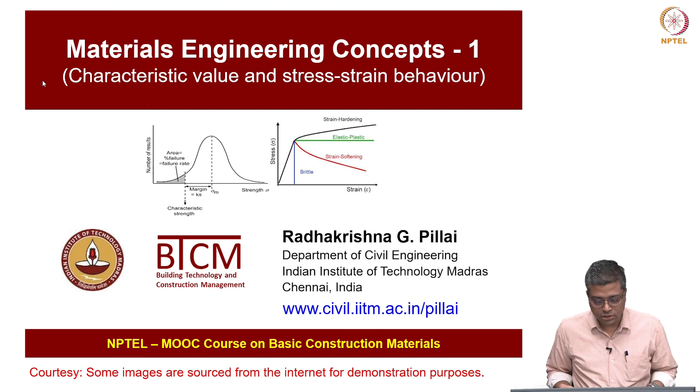Hi, today we are going to cover characteristic value and stress strain behavior of various materials. So, there will be 3 lectures which I am planning in this materials engineering concepts. Today is the first lecture, and these are the reference books which I use in this course module, and also we use a lot of information or photographs etc.

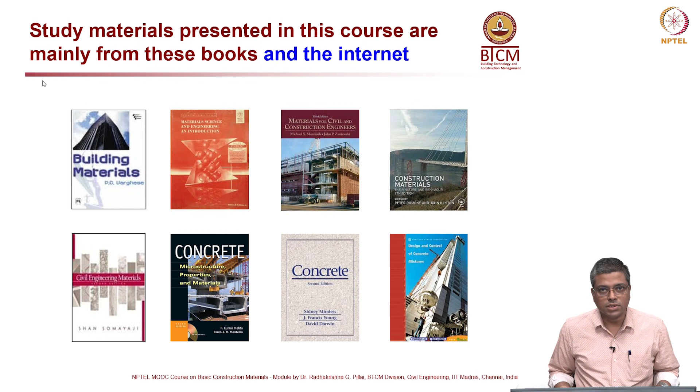from the internet. Now, the outline of this lecture will first cover variability in various material properties, and then also how to address this variability in the properties in the design process. That is where we use something called characteristic value, and then also we will discuss the stress strain behavior of various materials. We will cover elastic modulus, Poisson's ratio, yield strength, strain hardening, necking and failure, etc.

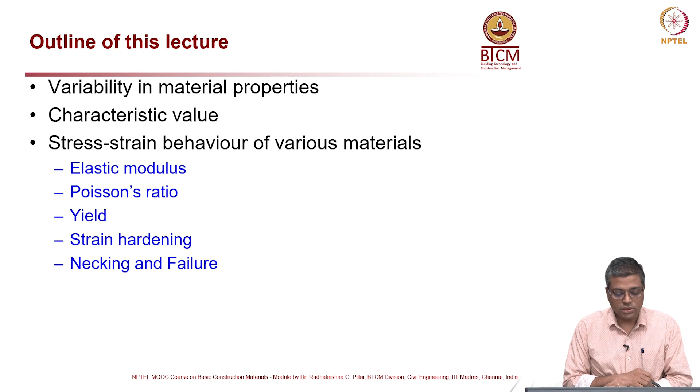So, variability and comparability of properties. I am going to cover just 2-3 material properties to tell you where we see the variability and what it is about. So, first let us talk about density. What is density? It is mass of a material per unit volume of the material, and it can vary significantly from material to material. From wood to metals, there could be a difference of about 2 orders of magnitude.

Another parameter is stiffness, which is the ability of any material to resist deformation, and from nylon to diamond it can vary by 3 orders of magnitude. Strength is another very important parameter which we look at while designing. Most of the time we give a lot of importance to the strength of the material, and it is nothing but the maximum stress that the material can resist without failure. From concrete to diamond, there could be a difference of 4 orders of magnitude.

Now, toughness is another parameter, which is also known as work to fracture or fracture energy. What is it? It is the ability to plastically deform and absorb energy until a failure occurs. If you look at glass, the toughness is very low, whereas in a very ductile material the toughness can be very high, or in other words, ductile materials can absorb a lot of energy before they actually fracture or fail.

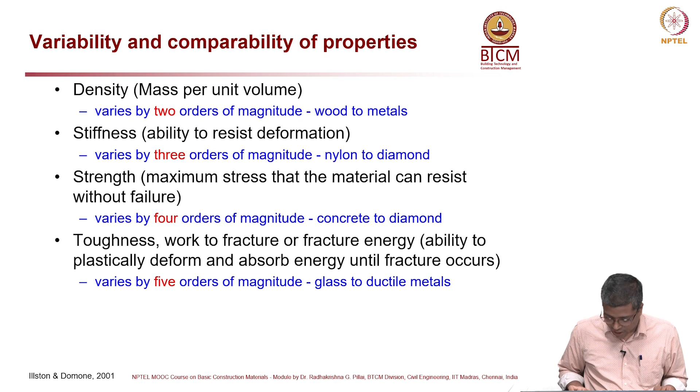Now, this is a table with these properties we just discussed. I do not want to go through the entire table; you can pause the video here and have a look at this table for a few minutes, and then you can understand the variability of these different parameters across different materials and also within the same material. For example, if you look at concrete, the density can vary from 1.8 to 2.5. The stiffness of concrete varies from 20 to 45 GPa.

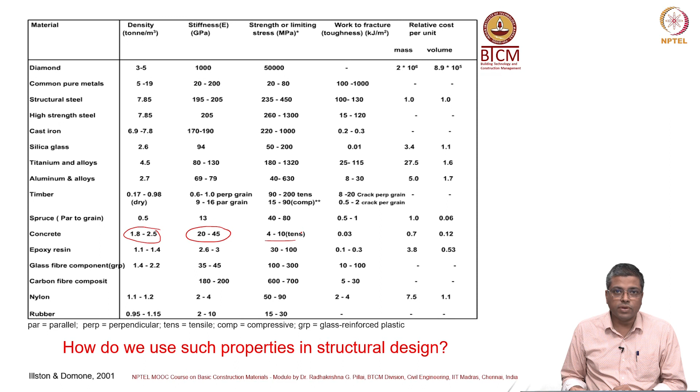If you are talking about strength, again we keep on modifying concrete. So, we see a lot of variability in the same type of materials by changing small things or the material design. So, in industry or in practice, we see a lot of such variations in the properties of materials. Now, how do we use these properties in structural design? We have to take care of the variability while designing, and at the same time we need to be safe.

Now, before we talk about that safety, I will also tell you about different materials which are used for similar purposes. For example, let us say you want to design a tension member in a truss. There you could use steel, you could use timber; many options are available. Here you can see steel in a truss member and also wood. Both can take tensile loads. So, what we are trying to tell is that for the same application we can use multiple materials. Now, in such a case, how would you choose a material?

For example, here you have a brick column and a concrete column. Both will have different strengths. So, we choose based on the availability of the material, how costly each material is, and also technically we look at the weight of the material, the limiting dimensions and the minimum useful life or durability. So, cost is very important, and then you have to look at the weight of the material and the limiting dimensions.

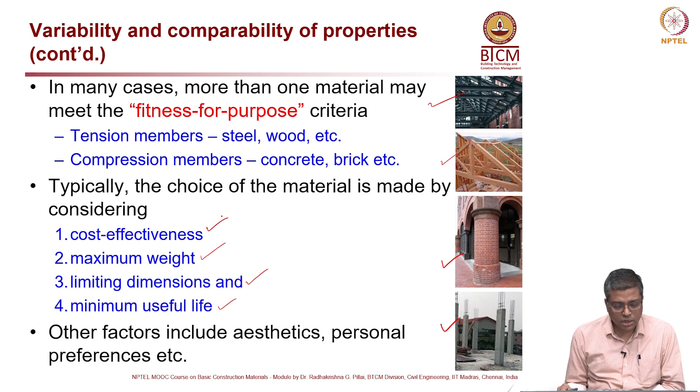So, we want to create more space inside our buildings, etc. So, these are different things which we have to consider. Aesthetics and personal preferences are also important to consider. Now, we talked about the weight criterion, right. So, how do we choose a material based on its weight? So, here I am going to show you an example.

I am not going to go in detail about this slide, that you can view later or pause and understand these equations. But the example here we are talking about is a cantilever beam, where you apply a force F at the free end of the cantilever. The thick black curve is the beam here, the cantilever beam.

And then you have an equation which tells you what is the deflection at the free end, which is this u, and that can be expressed like this in this orange box. The equation u is equal to the load times S cube divided by 3EI, where S is the length of the cantilever beam. Now, E is the modulus of elasticity, I is the moment of inertia. By looking at the cross section we can calculate that.

So, for a rectangular section, I is defined as BD cube by 12, and now you plug this I into the equation in the orange box, you get this. D is equal to (4FS cube by EBu) to the power 1 by 3, and from that we can get an expression for weight, where rho is the density. So, you can simplify that into this orange box here, an expression for W. Now, W is the weight.

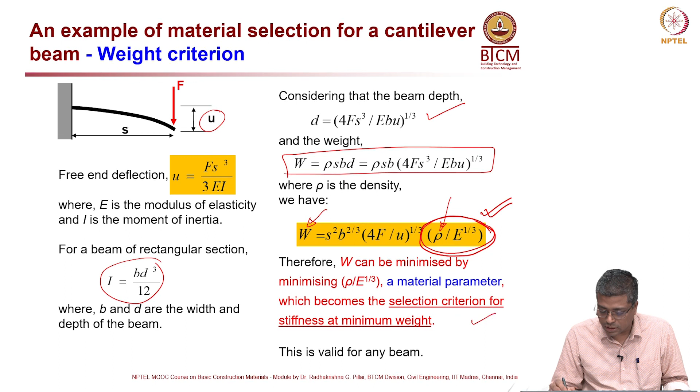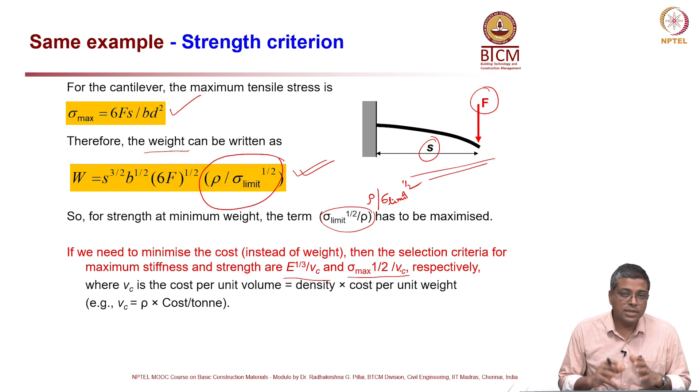And because it is not only strength and weight which you have to consider, money is also very important. That is why we also talked about cost. So, you have to think about various aspects and then see which is the most feasible solution for you to adopt.

Now, this is a table, you can look at this table here. For example, for a diamond, for the same application I can choose different materials, but the cost is going to be exorbitantly high in case of diamond. So, we may not go for it.

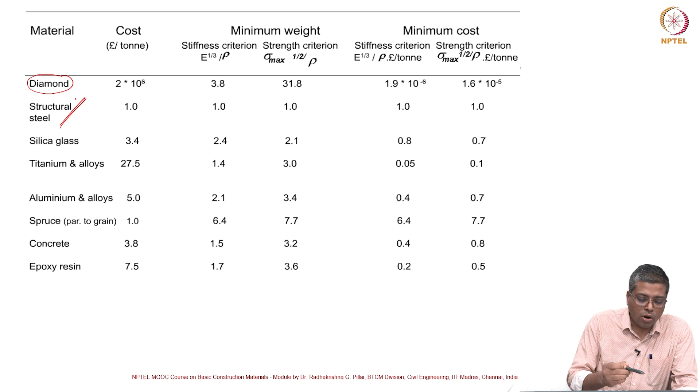But definitely people sometimes compare. Let us say for a building, if you are talking about column and beam sections, whether structural steel or concrete is the better option for you. There cost can play a role. For example, if the cost of steel is 1, in case of concrete you can actually have less; that is the main reason why concrete is sometimes more popular than steel.

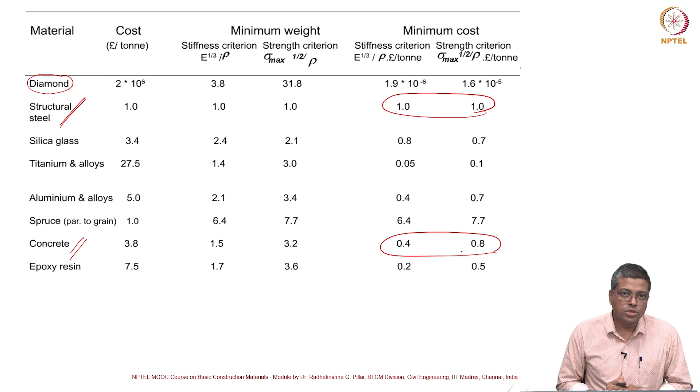So, different options are available; you have to have tables or information like this before you can choose what material to be used. When cost is neglected, diamond, titanium, aluminum, wood, epoxy are the best, but that is not the case in most applications. When cost has to be minimized, conventional materials such as wood, concrete, steel might be more beneficial.

And of course, you have to think of the time and location where you construct. For example, wood might be cheaper where a lot of timber is available, but not in places where it is not abundantly available. Concrete and steel depend on where the manufacturing plants and cement plants are located, and various factors govern the cost of different materials. So, we have to think about the cost also while selecting materials in addition to the technical features.

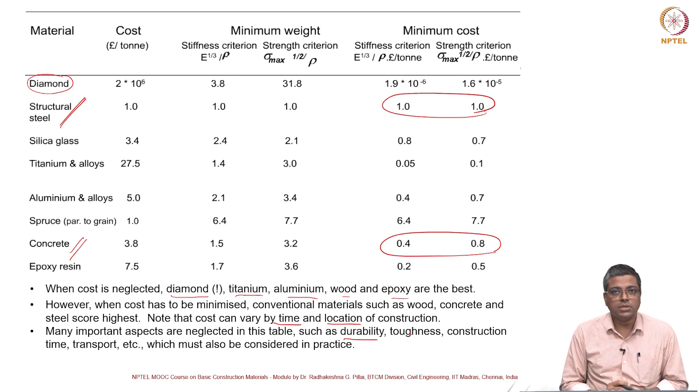Many important aspects are neglected; this is a very simple table. You have to also think about durability, toughness, construction time, transportation, and many other parameters before we really choose a particular material for construction.

Now, there are mean and variability in the material strength. For steel here, T stands for tension, and C is for compression. Steel with a mean strength of 460 megapascal has a coefficient of variation of the tensile strength of about 2%, whereas the coefficient of variation for compressive strength of concrete can be about 15%.

Why? Because steel is a more homogeneous material compared to concrete, and steel is manufactured with much better quality processes, whereas concrete uses natural materials like aggregate. Cement is processed, but aggregates have a lot of variability, and the interface between cement and aggregate differs within the concrete. That also depends on how the concrete was placed and compacted. So, we generally expect a wider variation in the properties of concrete than steel.

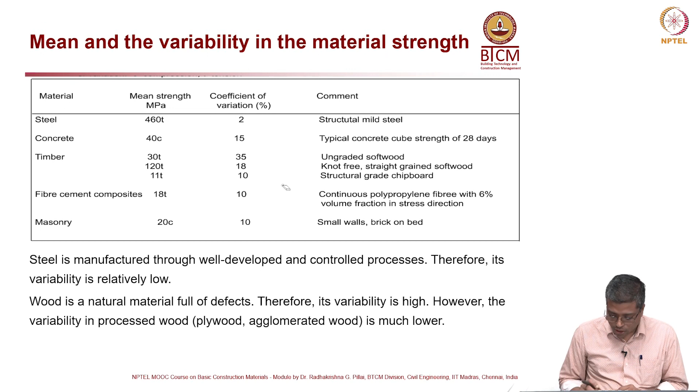So, you can see this variability across different materials, and that has to be considered in the design process. We cannot always use the mean value for design, because then 50% of the values are going to be above the design value and 50% below, meaning a very high chance of failure of the structure. So, what do we use? We use something called characteristic value.

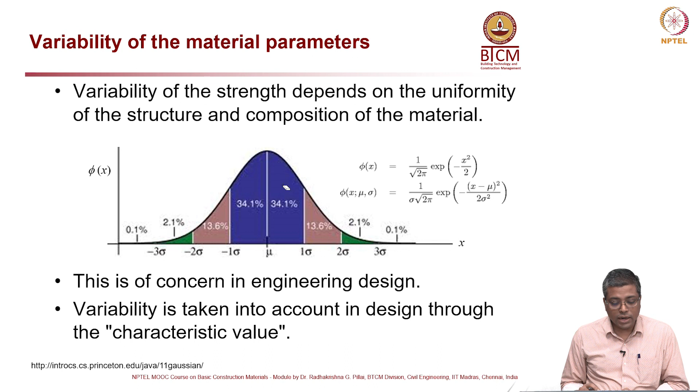Now, what is this characteristic value? The variability of the strength depends on the uniformity of the structure and composition, so a lot of variability is possible. We typically express this variability with a normal distribution. In design and material selection, the characteristic value is a safe value that corresponds to a probability of failure at an acceptable level.

Look at the graph on the bottom left. Let us say I do 100 tests on concrete cubes, perform the strength test on all those cubes, and then plot these 100 values; then I would get something like this.

The number of results will follow something like this. This is what we call normal distribution. Okay. Now, so this is the strength of cube, it is plotted like this, and then for each value how many specimens actually have that particular strength. So, on the horizontal axis or abscissa you have compressive strength, and on the vertical axis you have number of values, number of specimens which gave that particular strength.

Okay. Now, what I am showing here is the average strength of all those 100 specimens might be sigma m, which means on the left side of this vertical dashed line you have 50% of the specimens, on the right side you have 50% of the specimens. So, here you have 50%, here you have 50%. That is the mean value.

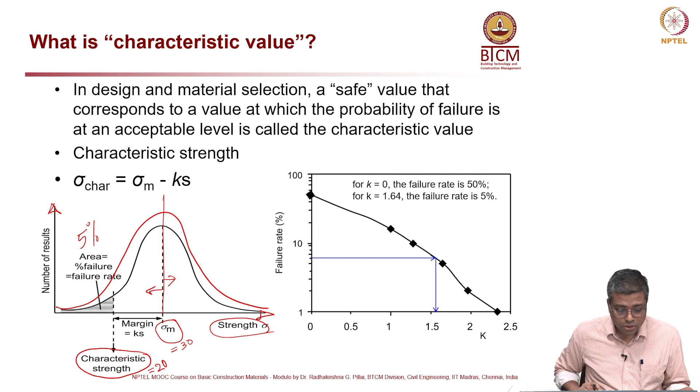If you are talking about a railway track, when a train goes through a particular point, every wheel will come in a very uniform way. The loading will be periodic but dynamic in nature. Every wheel, when it passes, let us say the wheel passes here and then moves away from that point, so load comes down, and again the following wheel comes and it reaches, something like that.

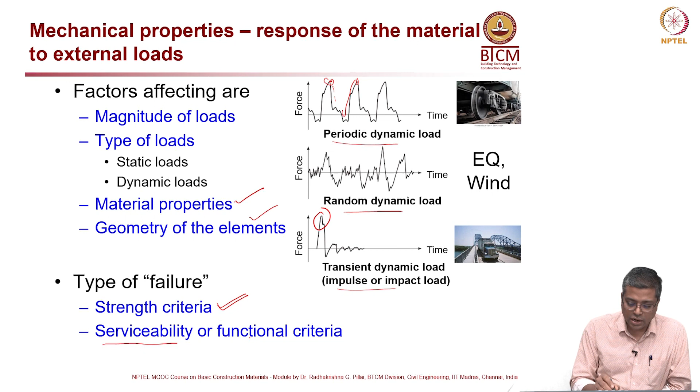Whereas, if I am talking about serviceability, maybe it is something like deflection. If you are talking about a bridge, I can say the deflection at mid span or the center of the bridge has to be within, let us say, 1 or 2 centimeters, some limit you will provide for the deflection. It is not that the bridge is going to fall or break into 2, but there will be some deflection, and you want to limit that deflection so that it is comfortable to use that structure. So, that is one example of a serviceability criteria or functional criteria.